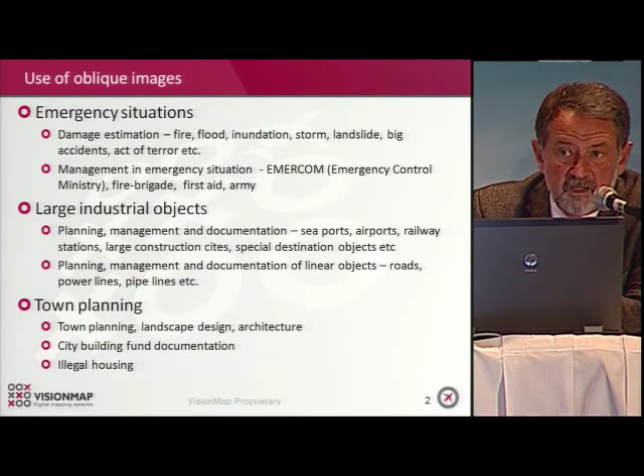And in fact, here I try to show some of the things related to emergency management, monitoring of large industrial facilities, urban planning, historical legacy mapping. Sometimes our legacy is crumbling away irrevocably, unfortunately.

Another broad area of application is real estate. I don't know how to say it in English. Yes, now I remember. Real estate. So, real estate valuation, real estate sales. It is quite a popular trend now.

And Pictometry, the famous company who started working on oblique imaging 10 years ago, but it was not a photogrammetric company. That is why we never took them seriously. But they started using oblique imaging for real estate valuation and real estate sales. It was their original idea. Later on, they started to develop some products for municipalities and so on and so forth, and many other things,

like for taxation purposes. In many towns and cities, there is a rule that you cannot hang out a poster larger than you paid for, or you always pay for the actual area that you cover with your advertisement. And to check it, every municipality can send an inspector. They have special inspectors who double check it, measure it.

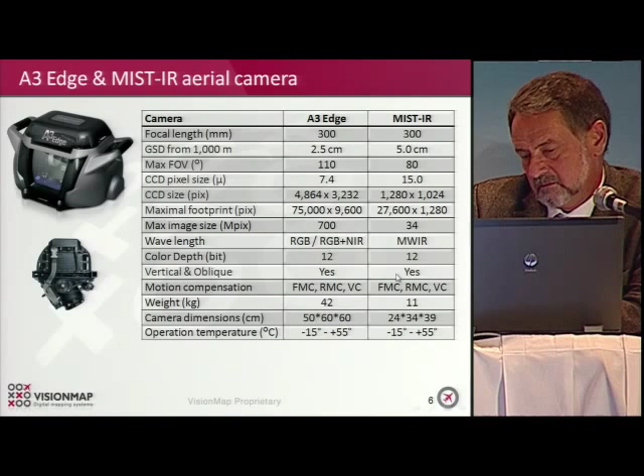Here you can see the principal specifications of our 2 cameras. They share one thing, that they have 2 rotating lenses. Both cameras have 300mm lens. A3 Edge from 1 kilometer can have 2.5 centimeter ground resolution. The other has 5 centimeter ground resolution. Other parameters are more or less technical. That's what the package includes.

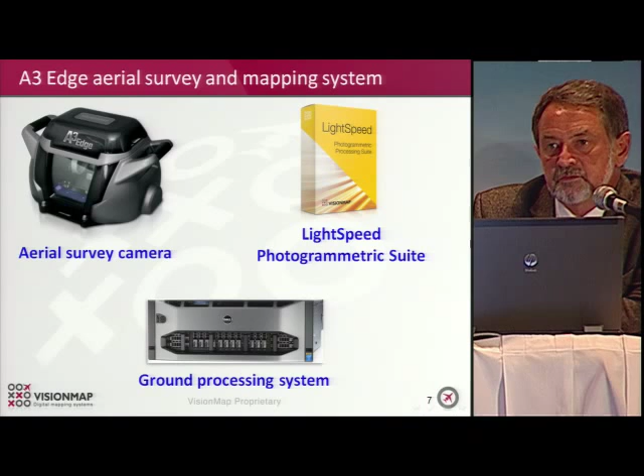Land-based systems. Originally, we provided a cluster land-based system, which was quite bulky, and now we can live without them, and we can work with server-based systems, the so-called all-in-one system. It is much less expensive than the cluster system, and it ensures good productivity, and is also based on different numbers of cores. A 60 core system is our basic package. It includes land-based storage, about 48 terabytes. That's quite a commendable server system, which can ensure high productivity and reliability of all the projects.

That's what the image looks like in A3 cameras. That's the whole image; the 2 lenses are rotating, and during the rotation they synchronously make photos. Each image is of central projection, a straight image. They are then processed in LightSpeed software. As a result, you get this one image that many different suites and systems can work with, including PHOTOMOD. Some of them are compatible with triangulation. Others can build a digital elevation model or regular stereo imagery.

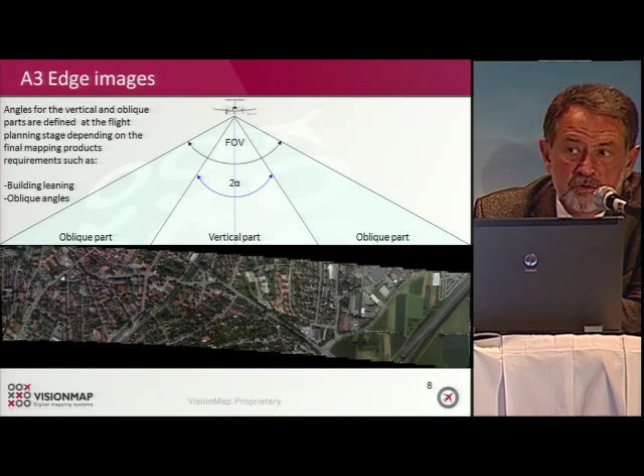The vertical part of this image and oblique parts of this image are programmed during the flight planning. So it's fully manageable before you start putting together a project. If the overall view is 110 degrees and you're flying over an urban area and your project is limited to an angle of buildings by 15%, for instance, you can have different angles here. This angle, orthophoto or effective angle, you can have 2 alpha angle depending on the needs of your project, and as a result you can have the expected angles of buildings for your orthophoto or any other project for that matter.

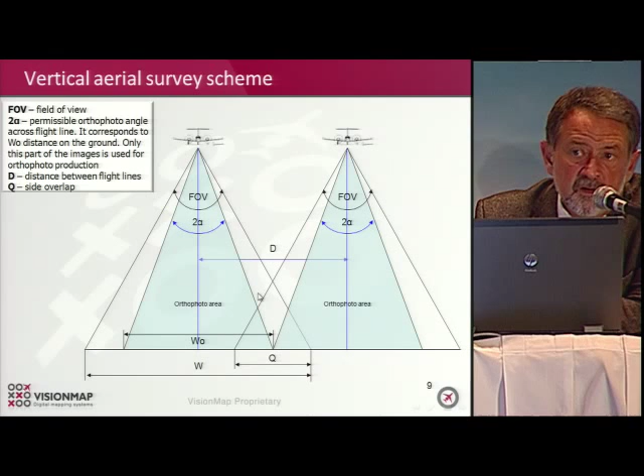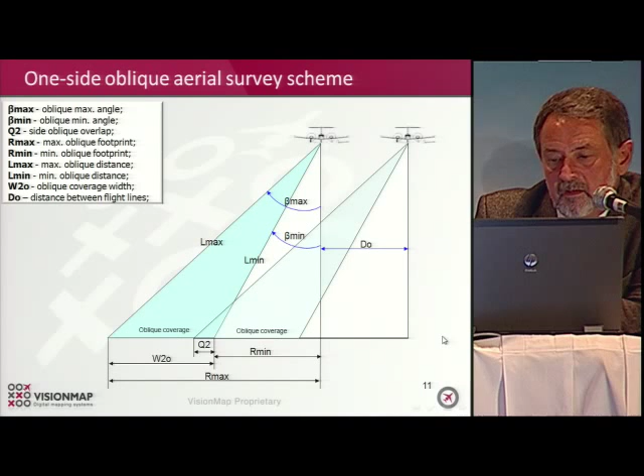There are 3 different schemes of imagery. This is vertical image acquisition used for regular orthophoto, and this schematic is used for oblique imagery. For oblique imagery, we need to know our angle of obliqueness here, which helps us in calculating the route. So this is more important, not the orthophoto angle. And the third type of image acquisition, a special type, is one-sided. If you want a high level of overlapping with your images, or you need to fly along some kind of border, or there is another type of barrier that you cannot overcome, you can use this type of imagery, which has only one-sided oblique image acquisition.

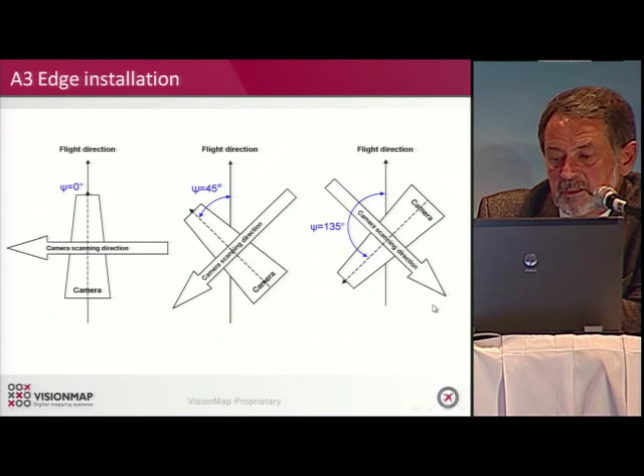Additionally, we offer 3 modifications of how we mount the camera in an airplane. The standard modification, when we mount it along the line of the flight, and 2 additional ones when the camera is mounted at 45 and 135 degrees.

Let's say you need to make a flight for oblique acquisition. Typically, every point on the ground is to be covered from 4 sides by images. If you have only one camera, A3 Edge, you mount it along the flight line, along the fuselage axis, and you do the side overlaps.

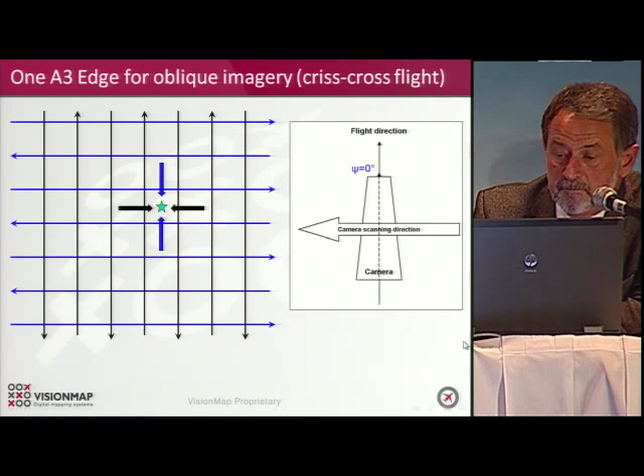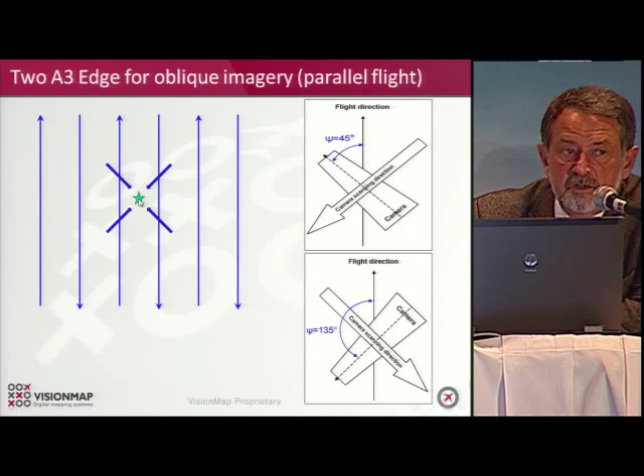If you have 2 hatch airplanes and you can mount 2 cameras, 2 sensors, one of those sensors you can angle for 45 degrees, the other 135 degrees, and fly like that. This way you save flight time, and still you will be able to generate every point on the ground from 4 directions. These are different flight scenarios.

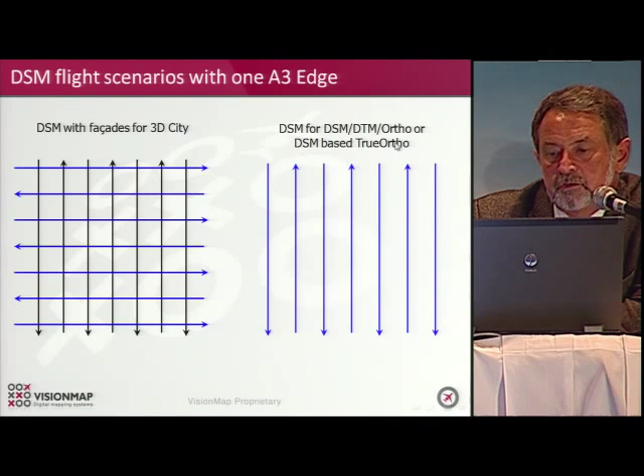If you need a DSM with facades for 3D modeling, you use this type of flight. If you need a DSM with true ortho, then you need a separate, a different flight scenario.

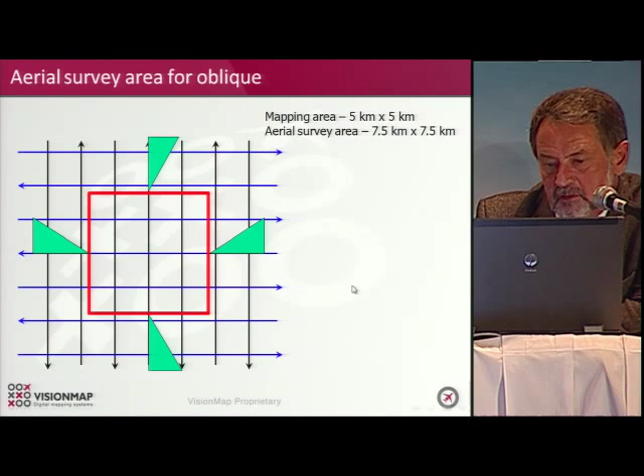Another thing to be taken into account during actual aerial survey is that your area will always be larger than your object's area, because you also need to cover the external sides of the object or the site with oblique images as well. So this needs to be taken into account, and our flight preparation application takes that into account.

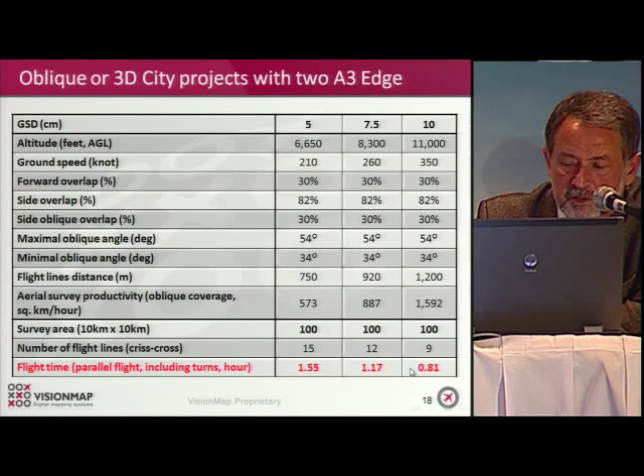These are a few parameters in terms of data acquisition. For 5, 7.5, and 10 centimeter GSD, and an area of 10 by 10 kilometers. So we're talking here about the size of an average European town. So for a 1 camera oblique flight, you will need 2.5 hours to do 5 centimeter images. If you use 2 cameras, you will need less than 2 hours, or even less than 1 hour for 10 centimeters.

If this is a regular flight without cross overlaps, you need to generate true ortho. For that, you will need slightly over 1 hour, and in the 10 centimeter resolution, less than 1 hour.

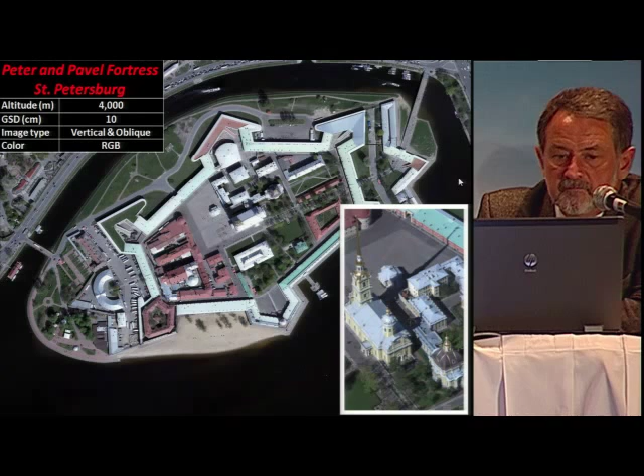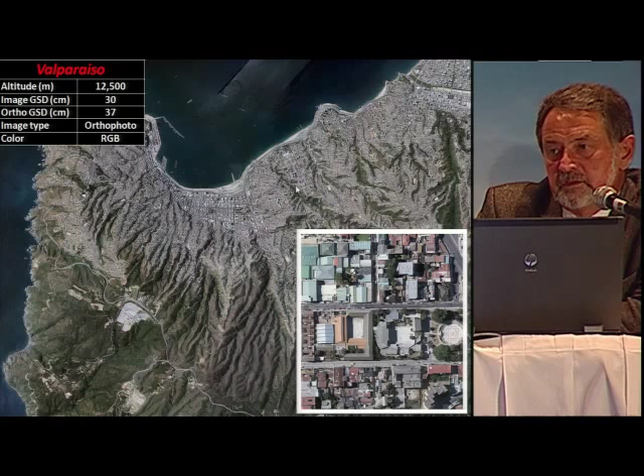This is an interesting project because the height was 12.5 kilometers, GSD 30 centimeters. They used the Learjet aircraft. The flight took 7 minutes for 3 surveys, for 3 strips. So they flew in the night, and in the morning they could collect images. And the territory was quite large.

Using the same project, a DSM-based true orthophoto was created from point cloud. Here the area size was 140 square kilometers, DSM density 100 pixel per square meter. To process, a regular computer was used, not even a powerful system, with 1 GPU card. The processing time 81 hours.

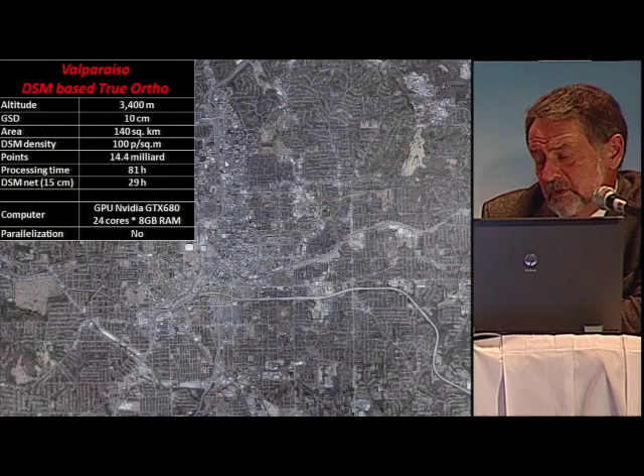But if we want to convert to 15 centimeters, then you need to add another 29 hours. So this is a resultant true orthophoto. There was no parallelization used. We're now working on parallelization of these processes to use them on cluster systems or in service.

In fact, national mapping agencies are very skeptical about this product. Still, last week we received good news from Germany, where the German National Agency is willing to accept DSM-based orthophoto as a photogrammetric product. Today, we and other companies work on enhancing and improving the quality of this product, because sometimes pixels are missing, you can get wrong colors, black colors need to be interpolated.

So there is a current effort in several European companies to fill that gap, and I think that in the several years to come, this should be a product that will replace ordinary orthophoto, because it has a bunch of advantages. When you get an orthophoto, you can fly in many cases at a much greater alpha angle. So you can expand the length between lines of flight, opening up whole new opportunities.

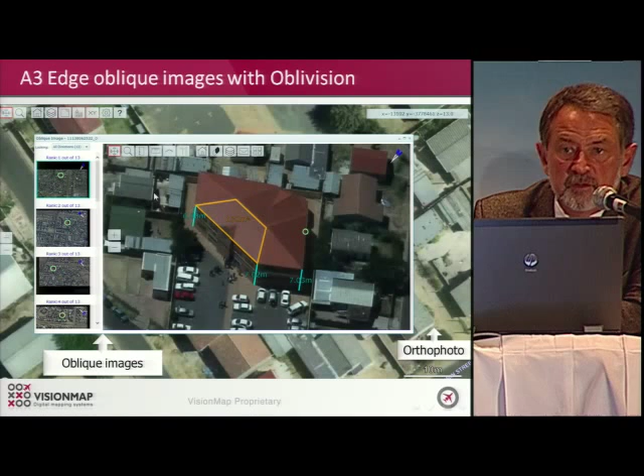This is Oblivision, software that allows you to import various layers, and then you can do measurements on individual images.

Acute3D, I talked about it. We did many cities like St. Petersburg, Tianjin in China. We did it completely using our camera and Acute3D. And a lot of smaller objects of the same kind. La Palisse is a town of 2,500 people.